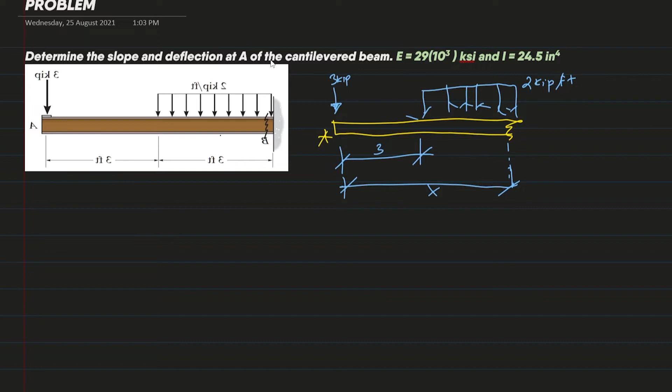So, ang UDL natin has a magnitude of 2 kips per foot. Okay? And then, itong length na to, this is 3. And yung buong length na to, like what we always do in our previous examples, let's name that as the length x. Okay, so now we will write our M, or the moment equation, kasi if you remember, our formula

is y double prime equals M over EI. M stands for the moment, this moment equation. EI, given yan, the modulus of elasticity and moment of inertia. So going back to the problem, clockwise moments positive, counterclockwise negative. Remember, kung saan natin pinutol, yun yung magiging pivot point. Parang doon siya iikot.

Okay? So, simulan natin dito sa 3 kip point load. So, this 3 kips or 3 kilopounds will create a counterclockwise moment. Ibig sabihin, that would be a negative moment. Okay? So, negative 3. And then, let us multiply the moment arm. The moment arm is x. Okay, next, punta na tayo dito. Meron tayo ditong UDL. To solve this, we need first to convert this to its point load.

Okay, so yung point load niyan would be located at the center of this UDL. So, alam natin yung magnitude niya, which is 2 kips per foot. Pero hindi natin alam kung ano yung length ng beam kung saan siya nag-act. So, we should express it in terms of x. Now, we know that this length is 3 and this length is x. So, we could say that this remaining length is x minus 3, di ba?

So, yung converted point load nito would be equal to 2, which is the magnitude, times the length wherein it is acting. That is x minus 3. 2 times x minus 3. So, that point load will create similar dito, counterclockwise moment, kaya negative 2 times x minus 3. Tapos, aside from that, we need to multiply the perpendicular distance or the moment arm of this converted point load, and that would be the half of this x minus 3, yung kalahati nito, di ba?

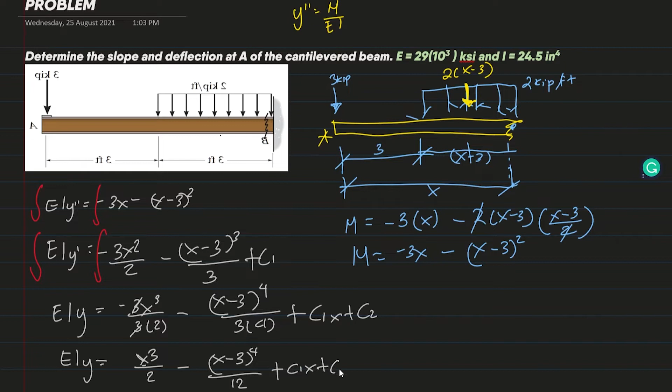So, EIy is equal to x cubed over 2 minus (x minus 3) to the 4th power over 12 plus C1x plus C2. So, before we can proceed to solve the slope and deflection, we need first to determine our arbitrary constants. Ano yung value ng C1 and C2? And how are we going to do that? Katulad ng mga ginawa natin sa previous videos, we use boundary conditions. Ano na yung alam na natin in this beam without doing any calculations, ano yung mga initial conditions.

First, we know that at the fixed support, the deflection and the slope is 0. So, dito, pwede nating masabi na at x is equal to 6, kasi nabaliktad yung orientation natin. At x is equal to 6, we know that y prime or the slope is equal to 0 and also deflection is equal to 0. Pwede natin itong magamit para ma-solve yung C1 and C2. Start natin dito sa slope equation para mas madaling substitution na lang.

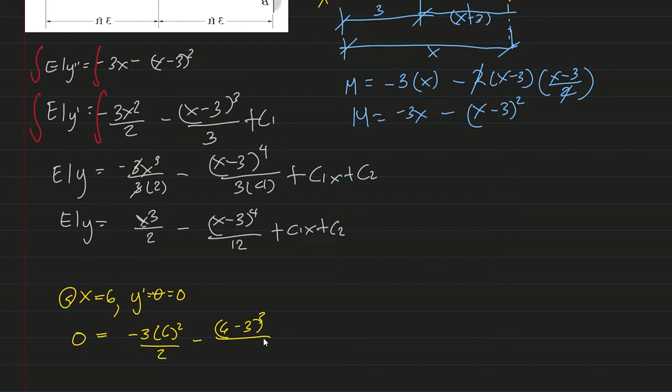So, at x is equal to 6, our y prime or the slope is equal to 0. Plug in natin dito. Solve natin yung C1. EI times y prime is equal to 0, is equal to negative 3 times 6 squared over 2 minus (6 minus 3) cubed over 3 plus C1. Since C1 na lang yung natira, pwede natin itong simplify. C1 would be equal to 36 divided by 2 is 18. 18 times 3 would be equal to 48.

Tama ba? Char. Calculator ko. 6 squared times 3 divided by 2. 54. Charing lang. Sorry na po. 54 pala. Pinositive ko na kasi nilipat natin sa kabilang side.

Then, 6 minus 3 is 3. 3 cubed is 27. So, magiging 3 squared na lang kasi cancel to. So, 9 na lang. 3 times 3, 9. Plus pa rin to kasi nilipat natin sa kabilang side, plus 9. Therefore, C1 is equal to 54 plus 9. That would be equal to 63.

Now, after knowing C1, we can now solve for C2. Again, using this condition in our deflection equation. At x is equal to 6, same pa rin sa fixed support, y or the deflection is 0. So, plug in natin dito yung mga nakuha nating values and makuha natin yung C2. EI times y would be simply 0, and x is 6.

So, 6 cubed over 2 minus (6 minus 3) to the 4th power over 12, plus C1, which is 63, times x, which is 6, plus C2. So, we can solve for C2. Calculator ko na kasi give up na yung brain cells. Negative 479.25. Okay, so knowing the values of our C1 and C2, pwede nating ma-solve yung mga pinapahanap.

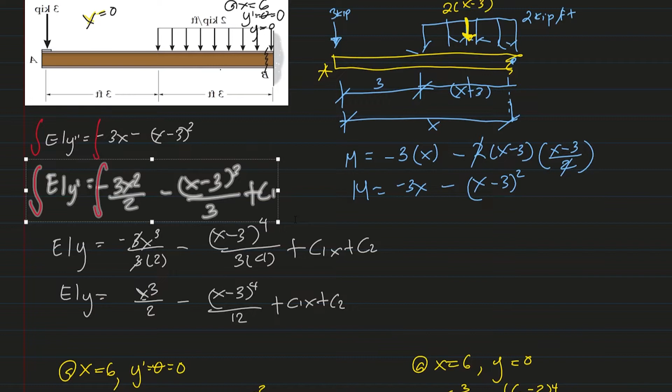So at x, gamit tayo ng blue. At x is equal to 0, what is the slope or y prime, di ba? Kasi similar naman yung dalawang yan. So, copyhin ko lang tong slope equation. Ayan. Okay, so solve natin yung y prime or the slope. Plug in lang natin yung x is equal to 0.

So, ito, EI y prime is equal to, ang x is 0. So, ito, 0 squared is 0 times 3 is 0. So, 0 yung buong term na to. Similar dito, 0 minus 3 is negative 3. However, we are following the rule of Macaulay's principle at which kapag x minus a is lesser than 0 or is negative, then we cancel that term.

Okay? Bakit? Kasi, ayun nga, sinusundan natin yung Macaulay's principle, di ba? When the result inside this parenthesis will yield a negative number, then cancel that out. Since 0 minus 3 is negative 3, we remove it. Okay? So, this is equal to C1. Ano yung C1 natin? That's positive 63.

Okay? So, tuloy natin. Now, meron tayong value ng EI. So, lipat ko na lang sa denominator ng kabilang equation. So, ano yung value ng ating EI? That is 29,000 KSI. Tapos yung I natin is 24.5 inches to the 4th power.

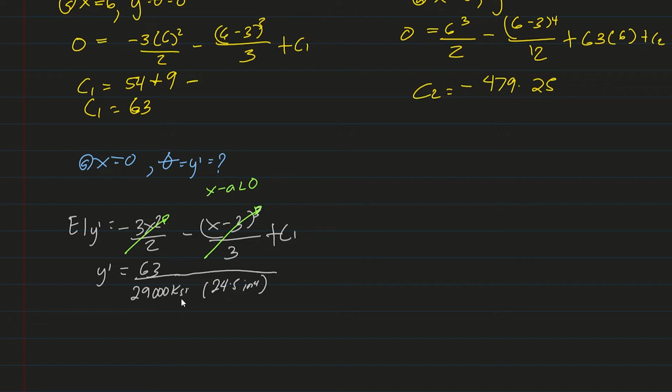Now, before we can proceed to evaluate this, kailangan nating i-check na pare-parehas yung mga units natin. Dapat yung mga units natin sa numerator should be equal sa denominator. For example, kung yung unit natin dito is kilonewton, dapat sa baba, kilonewton rin. Kapag meter. So, sa numerator, itong 63, nanggaling yan sa ating moment equation, diba? And sa ating moment equation, yung ginamit natin na units is in terms of kips and foot. Okay? So, this is in kips and foot.

So, parehas din dapat sa denominator. Yung mga units natin in terms of force is dapat naka-kips or kilopounds, and yung distances is in terms of foot. So, unahin natin tong KSI. Ang KSI is kilopounds per square inch. Convert natin yan. 1 KSI is equal to 1 kip per square inch. Ang 1 KSI mga bes, kasi K is kilopounds, is 1 kip over square inch. So, cancel yung KSI and KSI.

Next, itong inches to the 4th power and inches squared, magka-cancel yan. Ibig sabihin yung 4th power magiging squared na lang yan. So, itong inches squared, we need to convert that into foot. Bakit? Para magkaparehas nga yung numerator tsaka denominator. Ilan yung 1 foot? 1 foot is equal to 12 inches. So, i-square natin yan. Therefore, makukuha natin yung sagot natin.

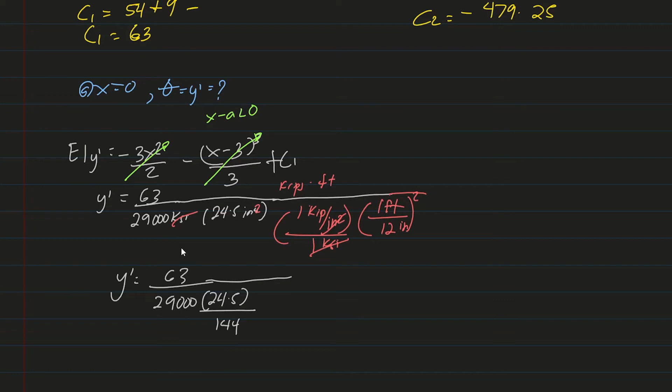Okay, so, simplifying that further, tanggalin ko na yung mga units. 63 over 29,000 times 24.5 times 1 over 12. Pero naka-square siya, so 1 over 144. Okay, so this would be our working sa calculator. Ito na yung ipa-plug in natin. Grab nyo na lang yung calculator nyo. Our answer would be equal to

0.01278 and so on and so forth. And yung unit natin dito would be rads. So, in radians siya, mga bes. Default yun na sagot kapag we are solving for the slope. Now, let us check our answer. So, our answer here is 0.0012 rads. Parang nasobrahan ng isang zero to.

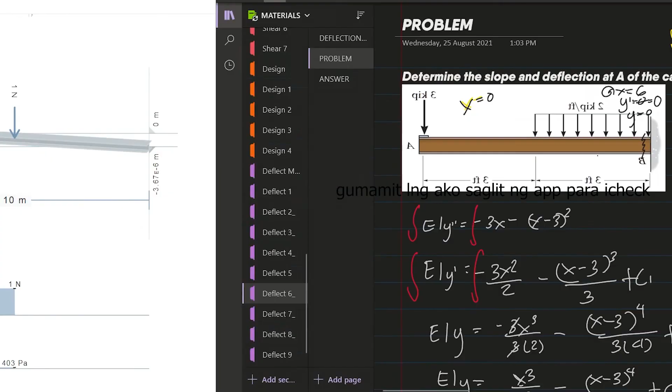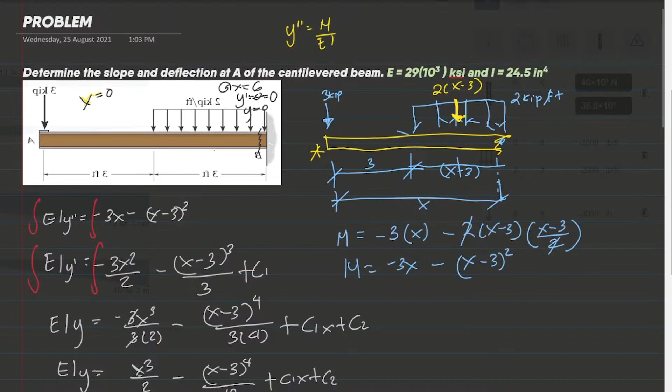Okay, tama. So, if you check, nag-try ako dito ng deflection calculator sa internet, online free app, to check my answer. And it gives 12.8 times 10 raised to negative 3, at which mag-move ng 3 decimal places. Ibig sabihin, 0.012, which is tama dito. Mali tong answer na to. I think tama naman yung conversions ko.

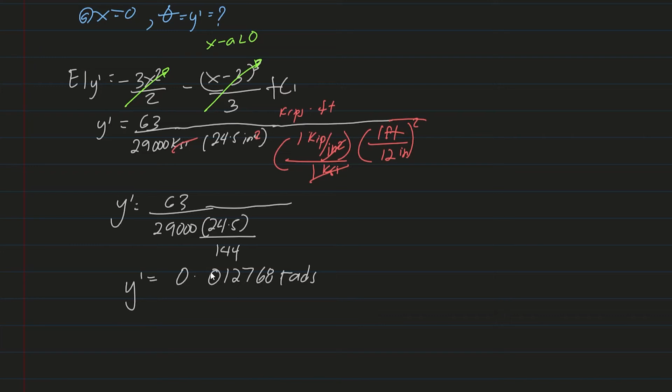Kindly comment down below. Okay, so the slope at point A is 0.012 rads, so radians, or if you would like to convert it in degrees, depende sa hinahanap ng problem, you can do it. Okay, so let us now move on sa next na required, which is the deflection at A.

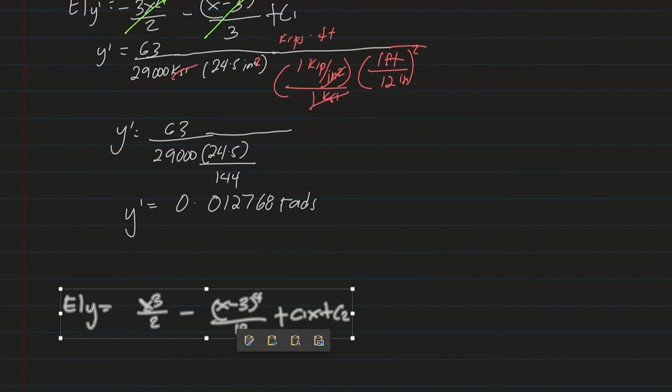So, deflection at A, let us use the deflection equation, di ba? Copy ko lang to. Same pa rin yung conditions natin. At A, x is 0. We need to find y, or the deflection.